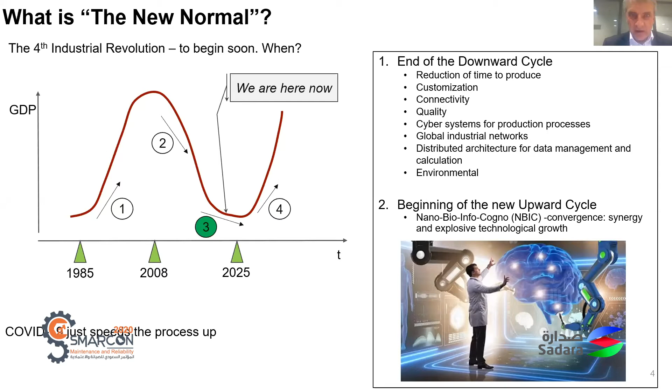I believe that very soon humankind will reach a certain point, let's call it a point of bifurcation, where all these trends get together. And here we may say that we will face very soon the real convergence of nano, bio, info, and cognitive technologies. And it will finally generate explosive technological growth. And only then the fourth industrial revolution begins. The speed will be tremendous, and the changes it will bring will be fundamental. So the question is, how the mining and metals industry meets all these new challenges, what kind of risks and what kind of opportunities it will face. What the fourth industrial revolution actually means for mining and metals.

You see on the left of the screen the metallurgical plant of the past. A lot of smoke, a lot of people going to the shop floors and also underground, and the labor conditions were terrible, the production rate was just very slow. But what about now? We believe that the fourth industrial revolution will give us quite a huge list of different opportunities. First of all, what will be developing very fast? Transportation networks of everything, of energy products, of end products, of ores, metals, etc. Transportation of power, transmission lines, substations, etc. Wide area networks, city infrastructures, vehicles with alternative power supplies, treatment of waste, defense industry. Whether we like it or not, the defense industry will receive a new impulse for development.

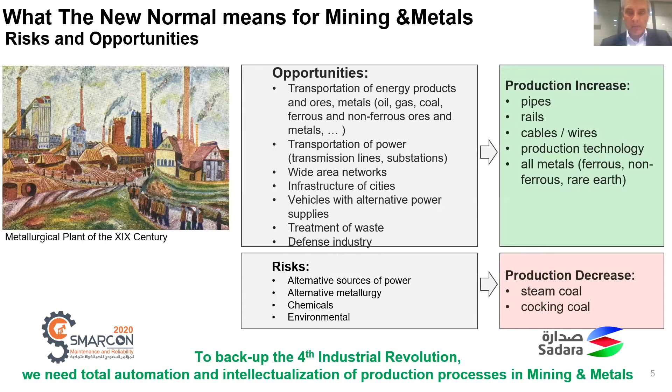And the major answer to both questions is, to back up the fourth industrial revolution, we need total automation and intellectualization of production processes in mining and metals. And here I would like to introduce the term of the smart enterprise. It's not a digital enterprise, it's a smart enterprise, which actually has four distinguished features. The smart enterprise has to be efficient, it has to be safe, it has to be environmentally friendly, and continually improving.

On the bottom of the screen, you see the typical value chain for a coal mining company, which starts with geology and mining, and then ore transportation, then processing, storage of coal concentrate, again, concentrate transportation, and finally, loading of the concentrate to the final customer. In fact, the ore processing is very similar to it. Of course, a metallurgical plant is a little bit different.

But again, when we are talking about efficiency, first of all, we are talking about the maximum production rate. That means that whatever we mine, we have to process. And here also we are talking about the minimization of consumption of different materials or energy, be it power, reagents, etc. And what we have discussed earlier today with my colleagues, the minimization of outages of equipment.

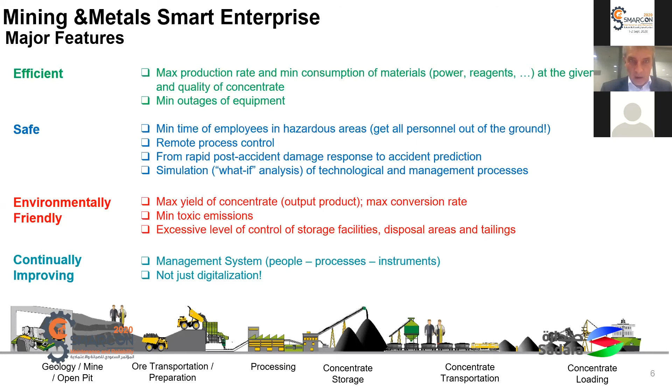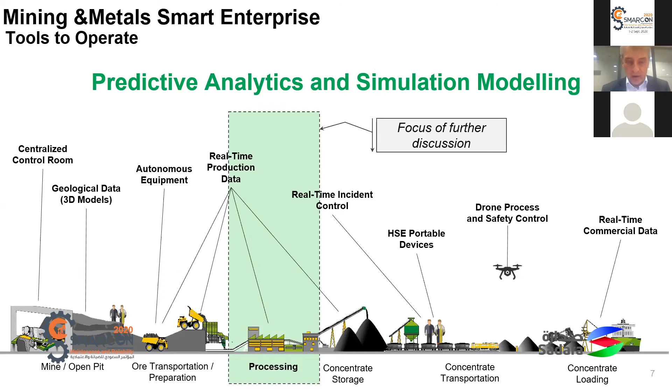So the smart enterprise, gentlemen, is not just a digital enterprise. The smart enterprise is the combination of many, many systems still managed by people, clearly defined processes and instruments. This is what we say smart. Later on in my presentation, I will mostly concentrate on the processing part of the value chain, and I will try to open different aspects of predictive analytics and simulation modeling for the processing plants.

Actually, how to get from a regular process to a smart process. This is the example process: metallurgy, zinc production, and one of the first sub-processes is zinc concentrate roasting. In the yellow picture in the middle of the slide is the fluidized bed furnace, where the input product is the zinc concentrate or blend of different zinc concentrates. The main output product is the zinc cinder. And finally, the technological mode is regulated by the air and oxygen, and some water, which also go into the furnace.

So step one to come from the regular furnace to the smart furnace is what we already have now. It is SCADA, the current system that controls the process and controls the conditions of the devices which are used in this process. So we have the technological mode control in SCADA and condition control in SCADA.

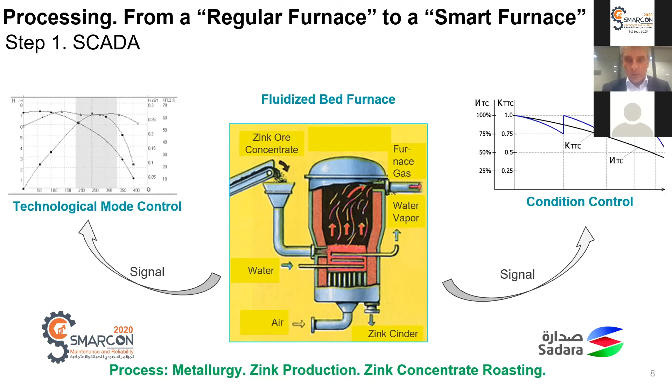Suppose this is not enough to control the process as is. And the second step is that we come from just one device, one furnace, to the whole process, where we have the zinc concentrate or blend of zinc concentrates. We have a conveyor, we have this furnace, and so everything is working together.

In this step, we can already regulate or control the process. We can control what kind of blend or chemical composition of zinc concentrates we have for an input. We can set up the technological mode, assuming that we fix the parameters of the zinc cinder. But now, how does it go? Usually we have the operator who controls the process.

The major action in this step is to substitute this operator with something automatic. Of course, this automatic will not be exactly this robot shown here in the picture. That will be the automatic algorithm that regulates three things: parameters of the input product, zinc concentrate, parameters of the output product, zinc cinder, and parameters of the technological mode. It should go without human interference. This is very important. And this is the way we go.

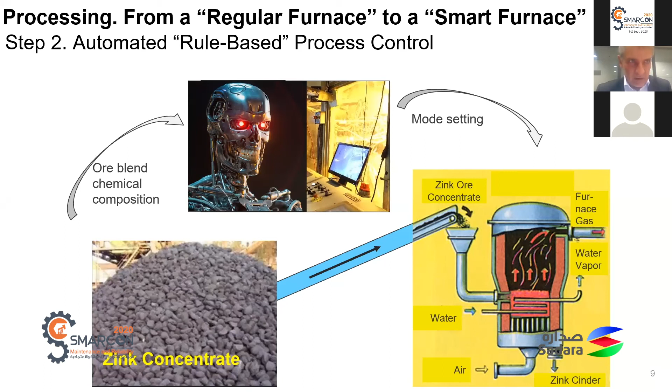But I suppose this is actually not enough, because there is step three, which I call the advanced predictive process control. We see here the same picture of the process, yes? The furnace, the zinc concentrate, zinc cinder, and regulation or control. And we added to this control process another important thing, which we call statistical optimization based on historical data. Imagine this furnace is operating for 5 years.

And SCADA actually collects all data necessary, nobody knows for what yet, but the data exists. We may take this data, run a certain algorithm, set the boundary conditions. And for example, let's optimize the blend of zinc concentrate while the technological mode is constant and zinc cinder parameters are constant. And the system will allow us to optimize the chemical composition of different zinc concentrates in the blend.

Or we may say something different. Let's find the optimal technological mode, having the zinc concentrate constant and zinc cinder constant, again, based on historical data. And we can plan for it, we can act for it. This actually means, and this is very important, that we can suggest now what will happen in the future, and we can decide also now what to do with it. And this is when the control really becomes smart.

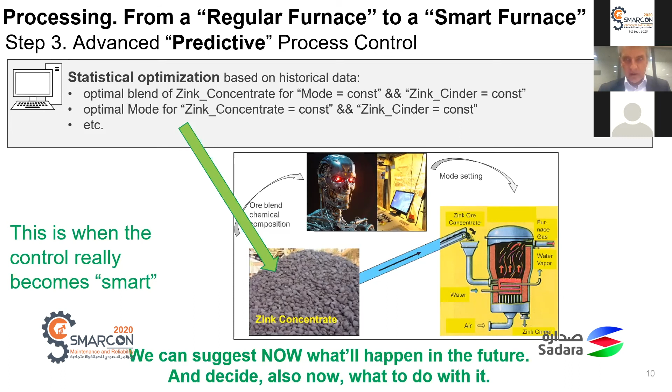Three steps to achieve the smart process. Smart, in this very case, the smart furnace. Same approach is for equipment predictive maintenance. We have the same furnace. And we may control or at least get the data about the furnace shell conditions and refractory conditions, which is the inner part of the furnace. It is made of special refractory bricks.

Because we are able to get different parameters from the furnace, be it pressure, speed of the air, speed of the fluidized bed, and temperature, of course. We have all this data for 5 years. And exactly as the previous speakers noticed, we may create the forecast model which, based on the current or historical data, will finally tell us today what might happen with this piece of equipment in the future.

5 minutes, Mr. Dmitry, for the question.

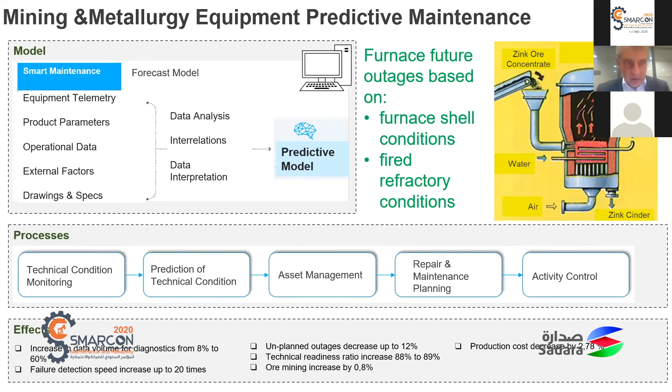Okay. So this is the smart maintenance. So we have smart technological modes and we have smart maintenance. And the biggest challenge, so many people ask me what the business challenge in this process is. The biggest challenge is that the standard algorithm library which defines these different processes, and we calculated there are several hundreds of different production processes in mining and metals, these libraries and these algorithms simply do not exist. They are beyond SCADA.

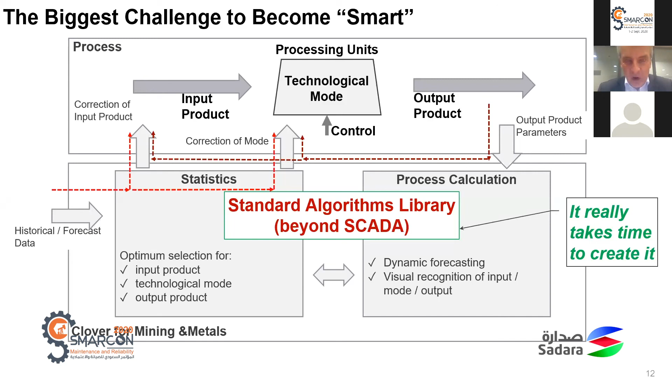And those who create these algorithms, test them and implement them, will become really efficient in the new normal. And the question is how to create this standard, what is needed, or who is able to create this algorithm. We believe that three things are needed. First of all, a software platform is needed that supports mechanical, physical, chemical processes, and also kinetics. This means how these processes develop in time. And the second thing which is needed is personnel: data scientists, mathematicians, programmers.

And the third thing, last but not least, is also personnel, technologists, and relations with major universities, because we know that the creation of such models is a scientific job. It's R&D, and it is mainly concentrated not in the plants, not at the mining and metal enterprises, but in the universities.

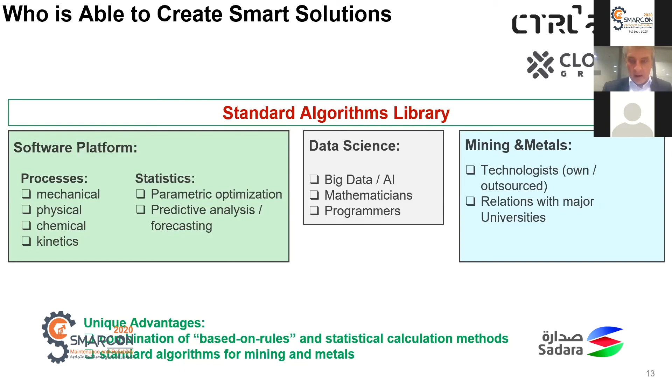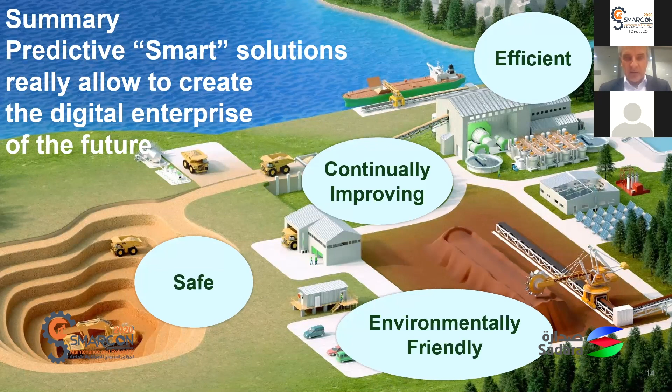And having resolved this challenge, I mean, when these algorithms are created, we will really be able to create predictive smart solutions and create the digital enterprise of the future that is efficient, safe, environmentally friendly, and continually improving.